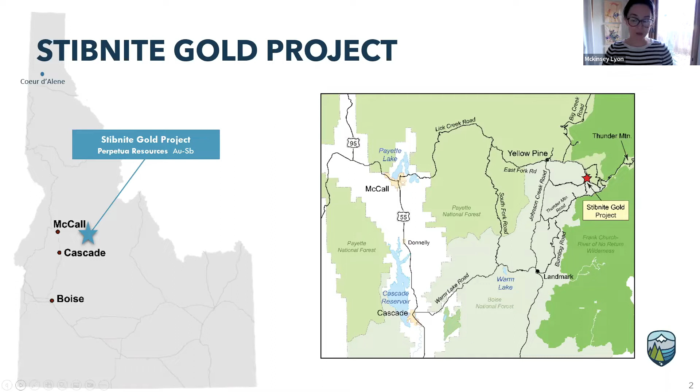So before I turn it over to Jordan Nielsen and Jean Bosley, I'm going to take a moment to review the project and where we are in NEPA. So to start, as many of you may know, our project is located in central Idaho, about 4 hours from Boise in the Payette National Forest. Next slide. And if I were to summarize our project, I would say that the Stibnite Gold Project is unique for 3 reasons. The first is that it is located on an abandoned mine site that is in desperate need of help, and our project is designed to make the site better than it is today.

Secondly, the Stibnite Gold Project will be the only U.S. mined source of the critical mineral antimony, which is critical to both our national defense and the clean energy transition. But today, the antimony market is controlled by China, Russia, and Tajikistan. And finally, we have and will continue to prioritize community partnerships and environmental responsibility alongside the safe and economic production of the minerals our country needs. And this approach is what responsible domestic production looks like.

Next slide. So it really is a very exciting time for Perpetua Resources. Moving this project forward has been a labor of love, but it has absolutely been worth it. After the last 6 years of regulatory review and public feedback, this project is improved, and we're proud of it, and it is ready to move forward. The project will provide a net benefit to this historic site, leaving water quality, habitat, and rivers better than they are today. And finally, it is more critical than ever that we regain control of our critical minerals like antimony that are urgently needed to support the clean energy transition and national defense.

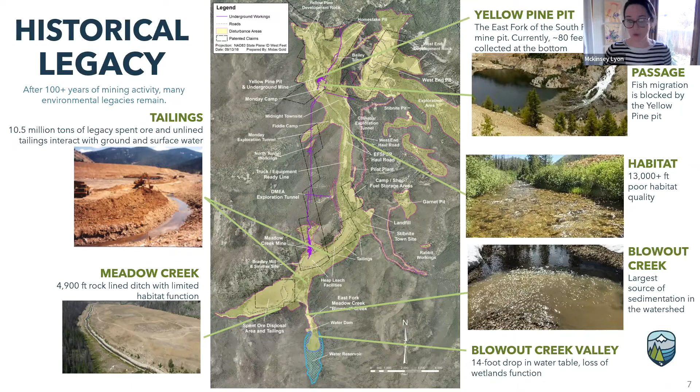However, while we can be really proud of this history, there were many environmental legacies that were left behind. So water is heavily degraded with arsenic and antimony from millions of tons of legacy tailings and waste that were left behind. The headwaters of the Salmon River flows into an abandoned mining pit, which has blocked fish migration for over 80 years. And really just generally, habitat conditions are overall degraded. And this is where we can come in. Because while being a brownfield site, we also know that there are robust mineral reserves still available at Stibnite today. The project economics are built on a reserve of 4.8 million ounces of gold, which makes it possible to access the 148 million pound antimony reserve and makes it possible to address the legacy features still left at Stibnite today.

And antimony production matters because we're vulnerable without a domestic supply. Today, China, Russia, and Tajikistan control 90% of the global supply, and we have no primary mined source here. But we need it, because antimony has long been essential in doing things like strengthening alloys and making them resistant to corrosion. It's essential as a flame retardant. It plays a role in solar panels and semiconductors and wind turbines, and is used in the primers for many military munitions. It's also key to this emerging liquid metal battery technology that's needed to get clean energy onto the grid.

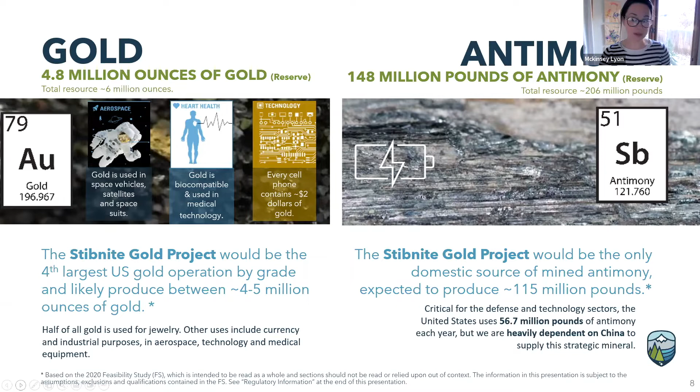And just this year, Congress took note and added an antimony reporting requirement to the National Defense Authorization Act. And this year, the Defense Logistics Agency also awarded Perpetua with 2 grants to study antimony from Stibnite for defense uses. So we have always known that if a modern mineral redevelopment were going to happen here at Stibnite, we would need to design a project that addresses the abandoned environmental legacies and bring value to our communities.

Oh, sorry, Alyssa, you can move forward 1 slide.

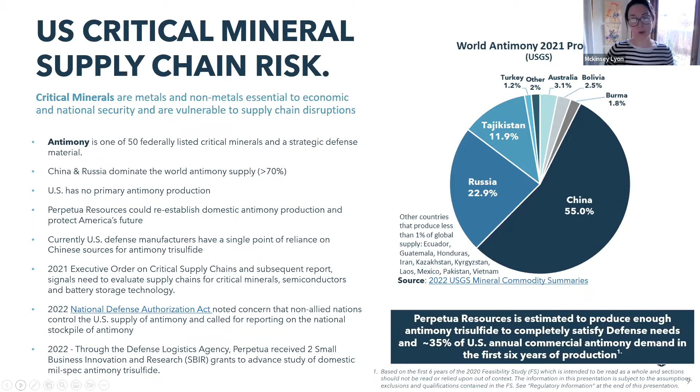And so this has been the vision that has really driven the last 12 years for our company, and we've been moving it diligently forward through the permitting process. Next slide. So I want to just provide a really quick overview of how our project has been refined and developed through the NEPA process.

So essential to our design of the Stibnite Gold Project is the plan to advance environmental cleanup of the legacy conditions as we mine. So this includes reconnecting the anadromous fish migration routes that have been blocked for 80 years, and also picking up, reprocessing, and safely storing the legacy tailings and the waste that's been left at site in order to help improve water quality. We've also designed this project with community feedback on everything from site access routes that you'll hear more from Jordan about, to doing our part to reduce light pollution.

So in 2016, we submitted our project to the U.S. Forest Service to launch the review under the NEPA process, the National Environmental Policy Act. And we are now in our 6th year of review under that process. Importantly, in 2020, the Forest Service released the draft environmental impact statement for a 75-day public comment period. And now, just a few weeks ago, on October 28th, the forest released a supplemental draft environmental impact statement for public review and comment. And now we are quite hopeful that we will see a record of decision in late 2023 or early 2024, which would put production in about 2027.

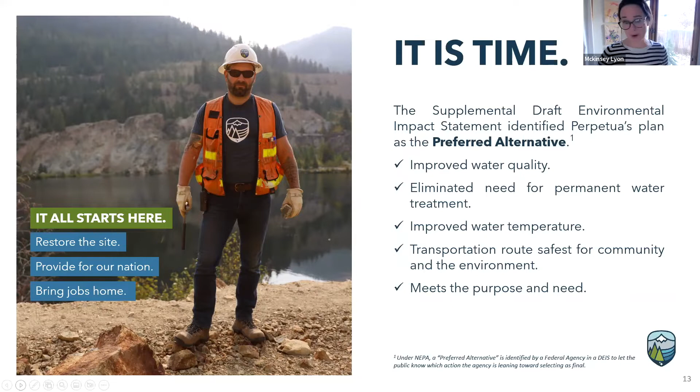And so in this process, the Forest Service has now identified, as I mentioned, that our proposed plan using the Burntlog Road is their preferred alternative. And in doing so, they established that our proposed plan, the modified mine plan, meets the purpose and need required under the regulatory framework, that we've improved water quality, that we've eliminated the need for permanent water treatment, that we've improved water temperature, and offer through Burntlog Road the safest route for people and the environment. So this is a lot of work and we're really, really proud of it. But I'm now going to turn it over to Jordan and then Jean to walk through some of the infrastructure associated with the project as it's designed now.

Okay. Can you guys hear me? We can. I can't turn on my video for some reason. All right, we'll work on that, but go ahead and get started. Okay.

My name's Jordan Nielsen. I'm the infrastructure projects manager. I'm going to be focusing mostly on offsite infrastructure. And Jean Bosley, following me, will be discussing more of the on-site infrastructure. Next slide, please, Alyssa.

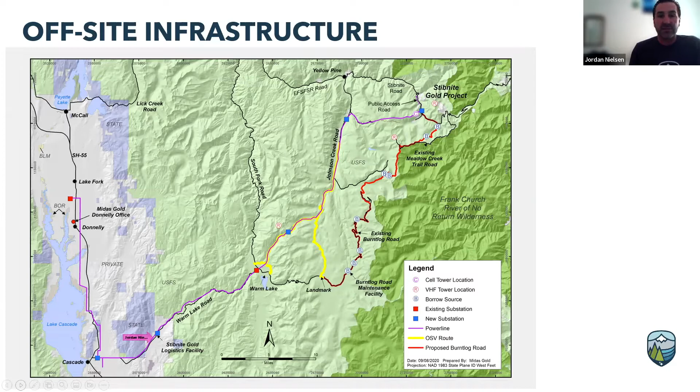Hello, everyone. So we're also going to discuss the Burntlog Road maintenance facility. Also, as we get up towards site, in this area here, we're discussing the worker housing facility, as well as down here closer to Cascade, the Stibnite Gold Logistics Facility. All right, Alyssa, next slide, please.

Okay, so first I want to start on access, and I'm really going to focus on our proposed access route, but Mckinsey did mention the Johnson Creek route alternative. That's this north-south black road out of Landmark that meets up with Yellow Pine. At Yellow Pine, it then heads east into Stibnite along the Stibnite Road. What we're proposing is at Landmark, we would head east.

We would upgrade a portion, about 20 miles of the existing Burntlog Road. We'd widen it; its average is about 14 feet wide now. We're looking at a running surface about 20 to 21 feet. So we would upgrade about 20 miles of that, and then we would connect the end of Burntlog Road to the Meadow Creek Lookout Road, which is up in this area here, with about a mile of existing road that we would upgrade there. And then we would add an additional 4 miles of pioneered road that would get us down into Stibnite.

So a few things that we looked at when we were looking at different alternatives, and we looked at more than just the Burntlog route and Johnson Creek route alternatives. We did a lot of trade-off studies of other potential routes into site that eventually worked their way out of our favored location for various reasons. And so I'll just focus on the positives of Burntlog versus Johnson Creek.

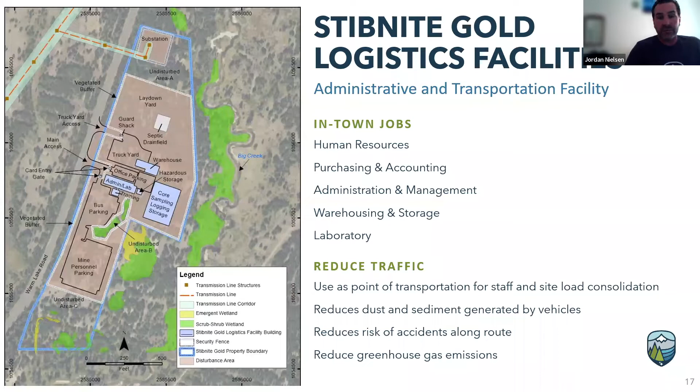Okay. As part of our plan, we would like to concentrate traffic between 5 a.m. and 7 p.m. Monday through Friday. For any of you not aware of this area, it's very active. Warm Lake Road is access to a lot of recreation to the east, where our site is located, and it picks up Friday afternoon through Sunday, as you can imagine. So we'd like to concentrate our traffic opposite that schedule so as not to cause too much impact. I touched on these two bullets.

One of the items too is that the logistics facility is where all of our heavy vehicle traffic would check in, so that we can aggregate loads before we head out there to minimize traffic on the roads, or provide a pilot vehicle for some of the more sensitive loads. That way we can monitor weather conditions and go at the most reasonable times to reduce the risk of any vehicle crash and potential spills.

A couple other things to note: we hear a lot about the impacts of our traffic. Down here at the bottom, we're expecting a 1 to 3% increase in the traffic counts from our project. Why it's 1 to 3 is we see a smaller impact north on Highway 55 going through McCall than we do from Boise to Cascade. And we'd see a larger impact on Warm Lake Road since there's less vehicle traffic than Highway 55, but it's a little over 3% increase from current.

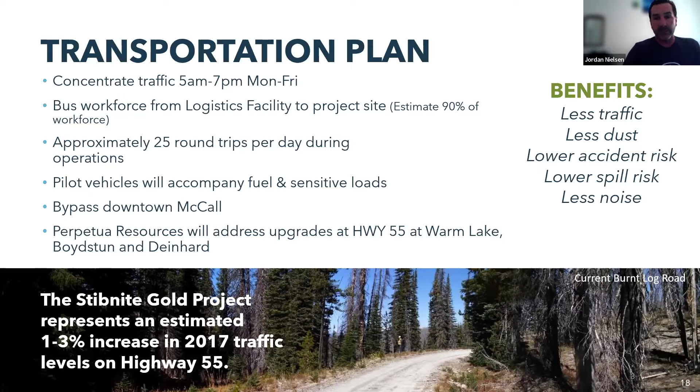Okay, so this is the Burntlog maintenance facility. I pointed it out on the first slide. This is about 4.4 miles east of Landmark. This is where we would provide summer and winter maintenance, and where our crews would basically be stationed.

We are proposing to put it in a borrow source. We need construction materials when we're building the Burntlog route, so instead of a new location, we'd like to utilize one of our borrow sources to build this facility. This facility will have an aggregate storage building, a fuel station, and a covered structure for some of our vehicles, for winter maintenance and summer maintenance.

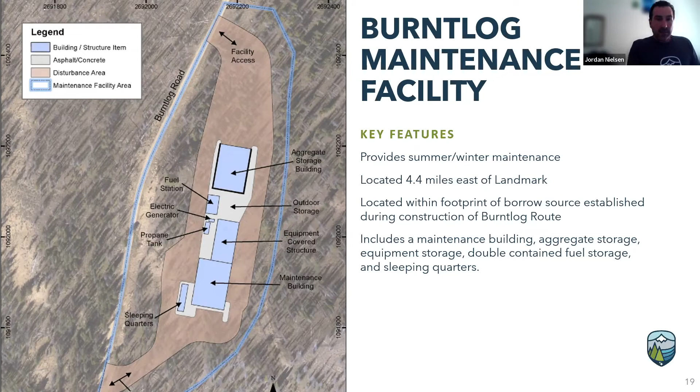Yeah, that's it. That's it for that.

Next slide, please. All right, so the worker housing facility is located about 2 miles south of the process facility. It's down here, let me point it out. This is where the Burntlog route access would come into the site. There's a security gate up here. So our vehicles would come in here on the south end and drop off all of our workers here. And then they would get to site utilizing an upgraded portion of Thunder Mountain Road, which I just pointed out.

I mentioned it earlier, but I'll say it again, we're proposing a 2-week on, 2-week off work cycle. We think that works well for people that don't necessarily live right in the area and can maximize time with their families.

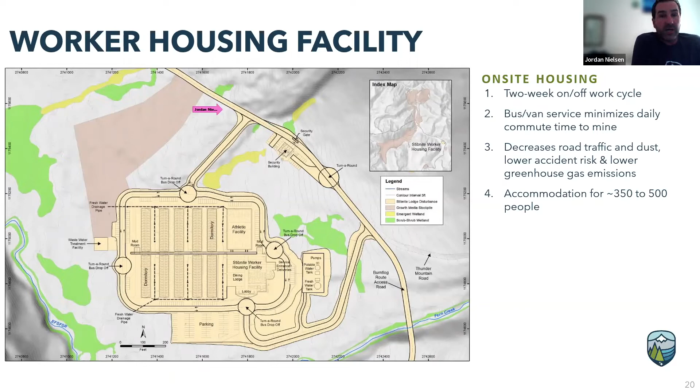So the facility will ramp up, it'll be pretty large during construction, because that's when we anticipate the most people on site. So we'll probably have facilities for about 500 people, and we'll reduce the size during operations down to an accommodation of about 350 or so. Next slide.

Okay. Thank you, Alyssa. So I think this is my last slide. This is a discussion of our transmission line upgrade. We've been working with Idaho Power to design about 72 miles of transmission line. About 63 of the miles exist already. It's a current transmission line route that provides power to the village of Yellow Pine. Warm Lake is a small village, a recreational area too, that it provides power to.

And so there are several substation locations that we would need to upgrade. It really begins at the origination at Hell's Canyon and the Oxbow and Horse Flat substations. But we're also looking to improve substations along the entire route. So City of McCall will see an upgrade. The Lake Fork substation here, between Donnelly and Lake Fork, would also see an upgrade, as well as the one here at Warm Lake. But we're also proposing several new substations, one being here down at Cascade.

This is sort of a junction point. Okay, I should step back one moment though: we are upgrading this line to 138 kV from its existing capacity of 69 kV. This location is a junction point where we have the 69 and 138 kilovolts coming into one location. So it's a switching station here. And at this location, we're also proposing a reroute.

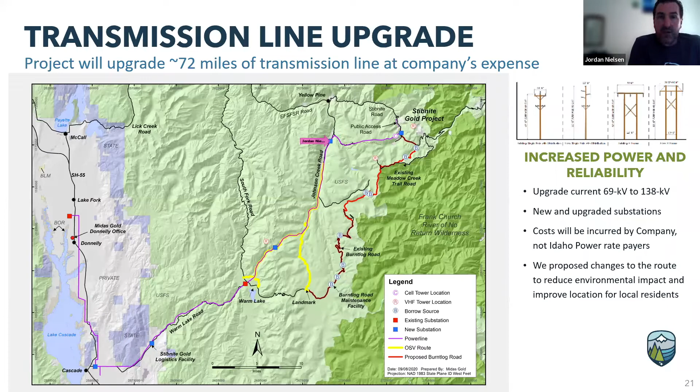Thanks, Jordan and Mackenzie. So I'm Gene Bosley. I'm a senior engineer at Perpetua Resources and led some elements of the feasibility design for the site components I'll talk to you about next. First of all, and Mackenzie covered a little bit about this, this is just the mine site layout.

Obviously, we've got quite a bit of infrastructure to build. Road and power Jordan covered very well, but we've of course got a lot of things to do on site to facilitate mining and ore processing. I won't dwell on the roads. There are, as you see here in the gray lines, plenty of internal roads within the site that are pretty conventional road building principles. Those will be gravel surfaced roads or rock surfaced roads. They won't be paved with asphalt or anything of the sort.

They'll be 100 or so feet wide for our main haul roads. And we have a lot of access roads that go down to 20 feet wide or so for light vehicles. And those are kept separate for safety's sake, and also kept separate from the public road. There's a public access road you see here in the northern part of the site. It goes up and around the Yellow Pine pit, and that will facilitate public access through the site, grade separated from any mine haul traffic. We don't want folks mixing with 150-ton haul trucks. It just wouldn't be safe.

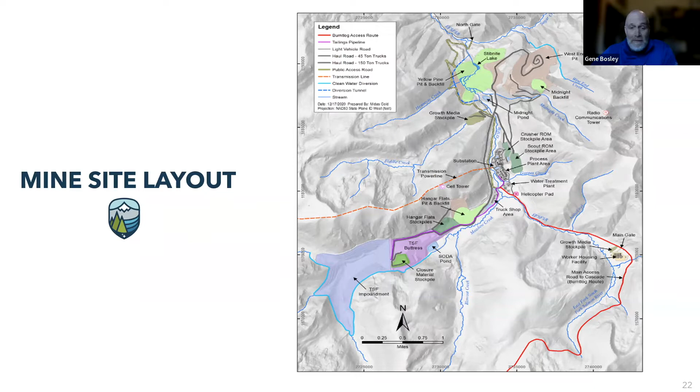So we'll control access, we'll control and escort, but allow public access through site throughout our operations to access Thunder Mountain and points east in the Frank Church wilderness area. So that's it for roads. The other three key pieces here are, one, the fish tunnel. We'll not cover that here today. That'll be covered in the River and Fish webinar coming up next week or the week after. The next one is the ore processing facility.

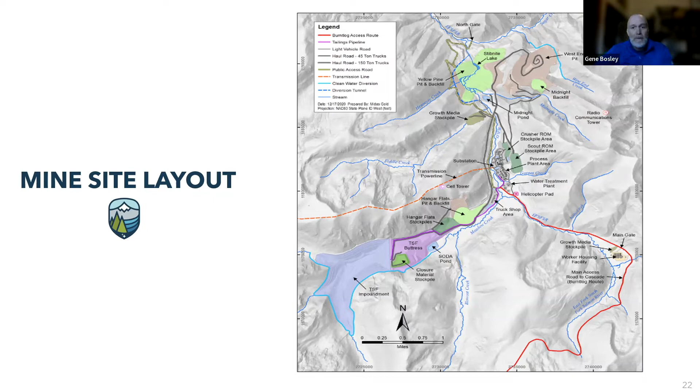That is the centrally located area there, right where the power and roads come together, in the middle of this map. That's where we will take mined ore and process it and end up with gold and silver doré, which is just bars of unrefined gold and silver, as well as an antimony concentrate. And once one does all that ore processing, you've got tailings left over, and those will be stored in the tailings facility, which is on the southwest corner of this map. We'll go into the ore processing and tailings on the next slides.

Okay, so the ore processing. I mentioned doré. That's again just a mix of the gold and silver. We do not have great silver recoveries, but silver is worth about 1/80th of what gold is worth. So we focused on gold recovery above all else in our process design. And we do pretty well there at 89% average recovery to doré. And again, that's 4-ish million ounces of gold over the life of the project.

Antimony, we recover it as the mineral stibnite, which is what it is in the rocks. We recover a very pure stibnite concentrate with a little bit of gold and silver, which we get as credit when we send that off to a buyer. They will recover that gold in their process while they process the stibnite to produce antimony metal, which Mackenzie covered as far as its myriad uses. And again, our concentrate is quite high grade, nearly stoichiometric stibnite in a few cases.

And once it's downstream of there, there's a few options: smelting, roasting, hydromet. All of those are to be determined. Those are the province of those who we will sell the concentrate to. Those are not part of our project itself. We sell, again, concentrate, not pure metal. As to how do we do it, how do we get there?

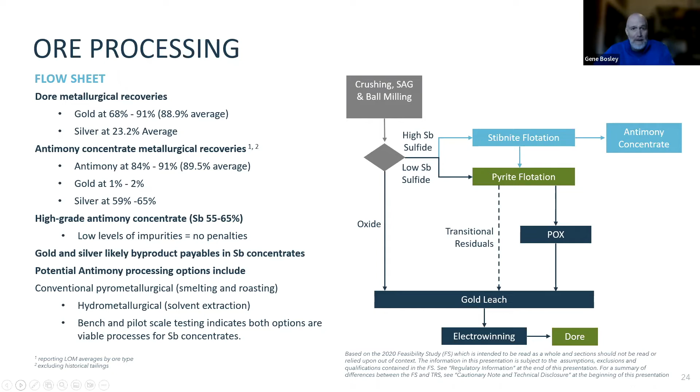Oxide materials, well, those go straight to gold leach. There is no reason to float them because oxide gold doesn't float. There's no way to concentrate it. You just go straight and leach the whole ore stream. And so that's in a nutshell how our process works, how we get the metal out. Next slide, please. Okay, that's just the intro slide.

So after all this processing, of course, you're left with tailings, right? We have 22,000 tons per day of ore processed. There's only a couple of grams per ton of gold. So a few grams of gold in every ton end up in doré, and then a few percent antimony by mass, depending on what ore we're working that day, ends up in the antimony concentrate. The rest of it is the ground up rock with the valuable minerals removed from it. And that's what tailings is, right? And we have to have a place to put those.

The tailings, of course, are mixed with process water. This is all a water process here throughout the plant. Everything is a slurry with ground up rock mixed with water. And that's how we get it to the TSF as well, is we pump a slurry. That slurry arrives at the TSF. Some of the water separates. The rest of the water is entrained in that tailings mass.

And then we keep adding more and more tailings to it. And the tailings that were already there consolidate, give back more water. And we pump that water back to the mill and recycle it. It's what we call reclaim in our business. So essentially it's a big circle. We pump water out with solids mixed in. The solids are retained in the facility. The water comes back.

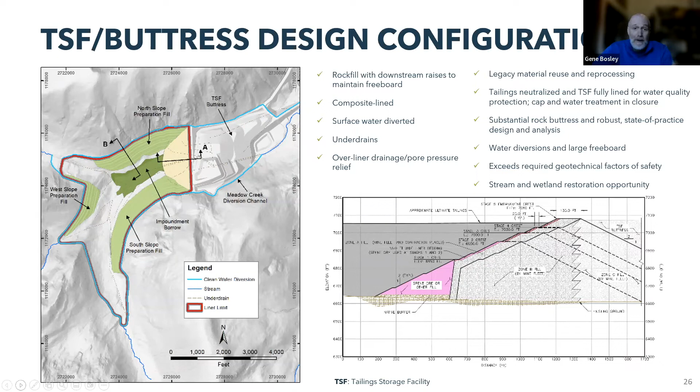And the thing is, a standalone never occurs. This facility will never be standing alone, but for maybe a couple of months early in its life before that buttress starts to grow. And I'll show you how that happens in a few slides. But just the hypothetical standalone dam meets or beats the regulatory standards.

And the numbers for seismic are similar, all the way up to what's known as the maximum credible earthquake, which is similar to the probable maximum flood. It's the biggest conceivable earthquake in a given locale. Our MCE will not be the same as the MCE in, say, San Francisco, but it's a substantial one. It's about a magnitude 7 and relatively close to the site on the Deadwood Reeves Creek fault. So this dam is stable, standalone for static conditions as well as the MCE.

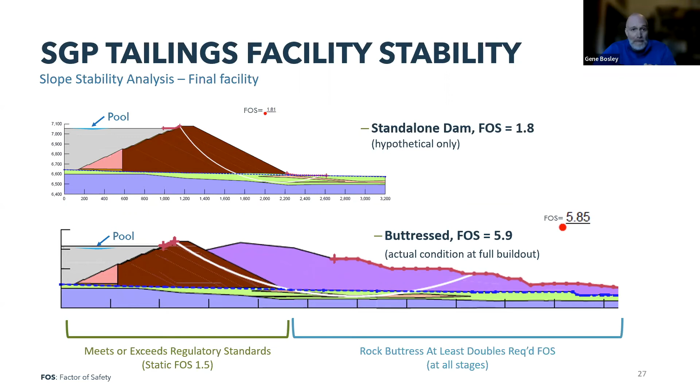And what that means is you have a rising deposit of mud that later becomes more like a soil as it consolidates, with a pool on top of it. But that pool is only ever a few tens of feet deep. The pool is very small relative to the size of the dam. It's not like a water dam where there might be 400 or 500 feet of water in the facility. There's not. It's a small pool sitting on top of a large deposit of what later essentially becomes a soil. Next slide, please.

Part of the consequence of some of the mine plan changes that McKinsey covered is that we have a lot of rock coming at us early versus the old mine plan, because we've eliminated the Fiddle development rock facility, which was 168 acres disturbance savings. Well, that rock had to go somewhere. One place it goes is to fully backfill the Hangar Flats pit, which is now also a little smaller. But the other place it goes is this buttress now can grow very quickly.

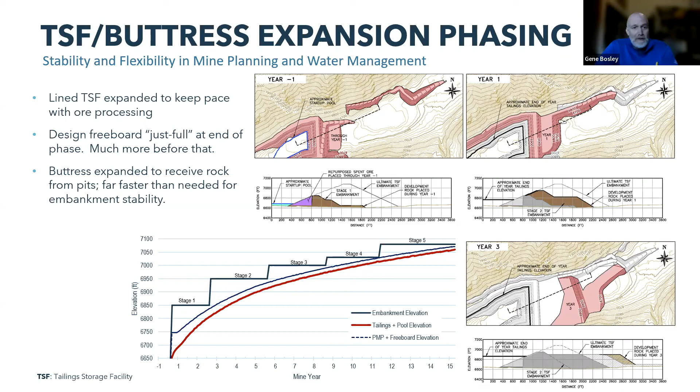But what that means is, we very early have reached our full height in our bulk fill, which means whatever may happen, right? I mean, this happens all the time. Somebody decides, well, let's debottleneck the mill and increase production to 30,000 tons per day from 22. Well, if you do that, your facility fills faster. And if you don't plan it correctly, you can quickly find yourself behind the 8 ball on dam raise, where your facility is going to fill before the next raise is otherwise scheduled.

Well, because our buttress grows this fast, you've essentially taken stability off the table. Whatever earthquake may happen, the dam itself will not move. But you've also given yourself the ability to, all you have to do is go and line the impoundment in the dam face and do the prep work associated with that lining work. You don't have to build 20 million tons of dam fill. So we have really a lot of flexibility in our dam phasing as a consequence of the new mine plan and the buttress growing so rapidly.

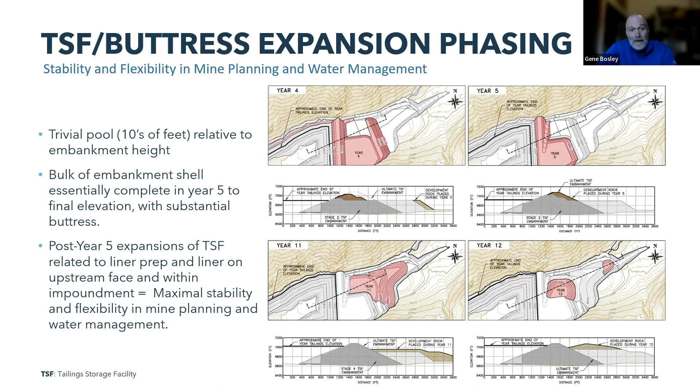And where this takes us is really this, right? Our facility, I forgot to mention, is downstream constructed, right? We always have rock on rock. We don't have new rock built on tailings, which is known as the upstream method. It is a rock fill. It's not soil fill, and it's not made out of tailings. The tailings are stored behind the dam. They don't form a part of the dam.

The liner is a complete composite liner. So that's more than one layer, right? It's a geomembrane on top of a geosynthetic clay liner, which is the state of practice for tailings these days. It's been reviewed. We've got a third party review team. We have that buttress. It, of course, is built and regulated in the U.S. The U.S. has a very robust dam safety program; we really are the international standard for dam safety programs. And of course, that dam is but part of the perimeter.

90% of the perimeter is not dam. It's mountains made of granite. So those are not going anywhere either. And where that takes us is, we know of no failures of a facility that has all these boxes checked worldwide.

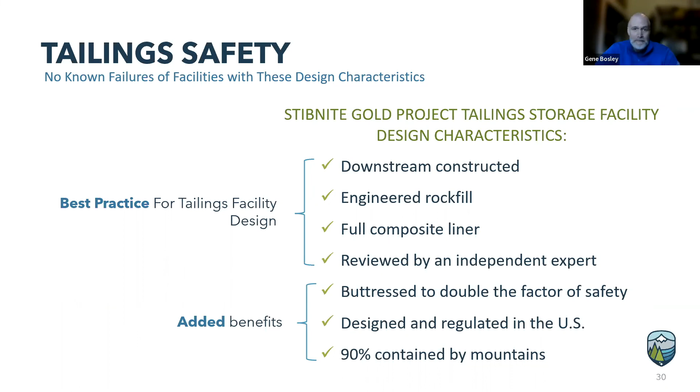And that's about ops, right? As well as long-term, everything that's stable in ops only becomes more stable long-term as the tailings consolidate. Tailings facilities, with few exceptions, are like a fine wine. They tend to get better with age.

And one of those aspects in ours is once we transition it from operations into closure, and once we get that tailings consolidated so that it's drivable, we can put heavy equipment out on it, is we're putting Meadow Creek back on top of it. And the full footprint will be lined now. It was previously just the stream corridors, but we'll have a geosynthetic liner on top of this to isolate everything from processed water that may come up. That water will be taken off and treated, and then discharged once it meets water quality standards.

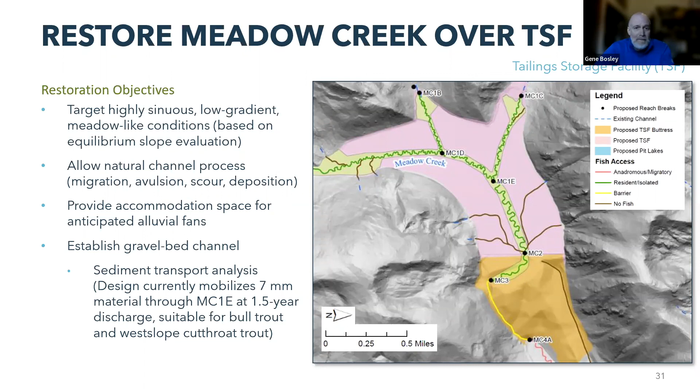I think that's onward to McKinsey. That's over to me. Thank you so much, Gene. And thank you so much, Jordan. Alyssa, you can go to the next slide.